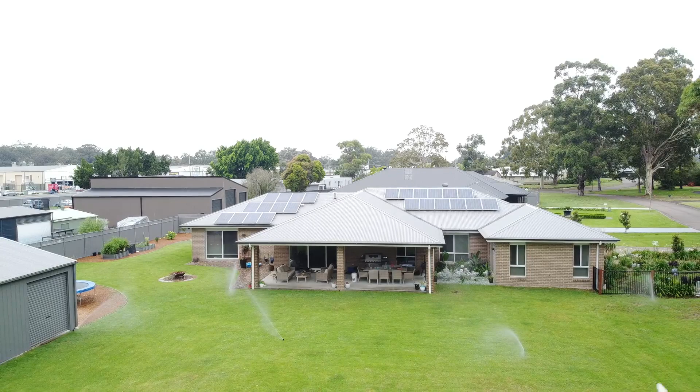So you'll end up with a whole pile of boxes full of all your kit and gear to do your irrigation install. But firstly, we need to get some planning done. So let's run through the steps to make sure you get it right. Now before you get into the design, there's one important factor you need to consider, and that's the pressure and flow from your selected water source.

Most people would use a hose tap, and in which case you want to do all your testing from that point. In our case, we've got a spear point, and we've got a pump that we know flows at 100 litres per minute, and we use that as a basis for all our calculations.

Now when it comes to town water, it's very important to test not only the flow, but the pressure. This allows you to select the most appropriate irrigation fitting and allows you to determine the maximum number you can run in each zone. So when it comes to testing this pressure, I think the best way is to get a pressure and flow device.

Now you can buy this online from an irrigation supplier or hardware store. If you're going through an irrigation supplier, they will probably come out and test it for you using their own calibrated equipment. If you want to do it yourself, there's a lot of videos around on how to properly use those pressure and flow devices.

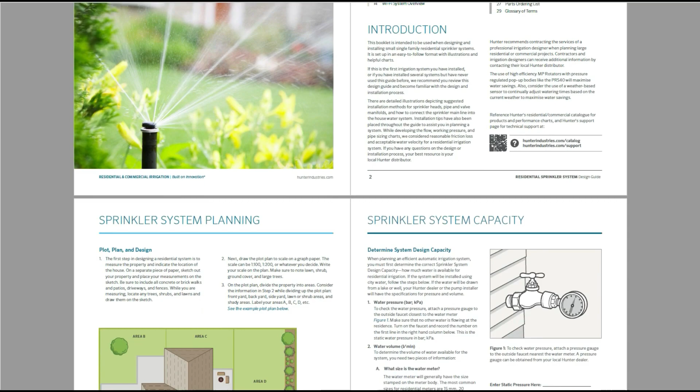Now it pays to have a look online, as most manufacturers have some excellent online resources. For example, Hunter Industries, who we're using for most of our gear, have this very handy and useful residential sprinkler design and installation guide. This is a very comprehensive document which takes you through planning your system, to selecting your sprinklers, to the installation, and includes some really handy illustrations and diagrams.

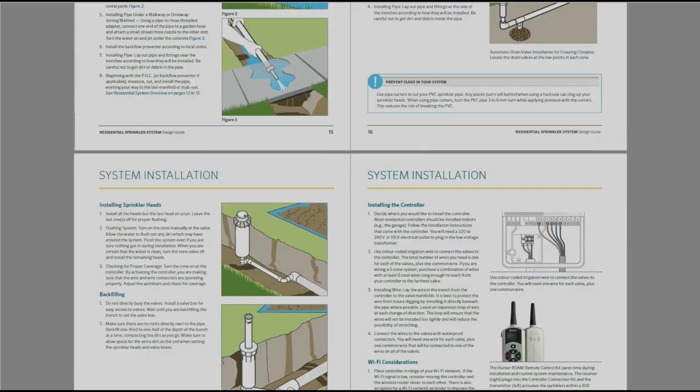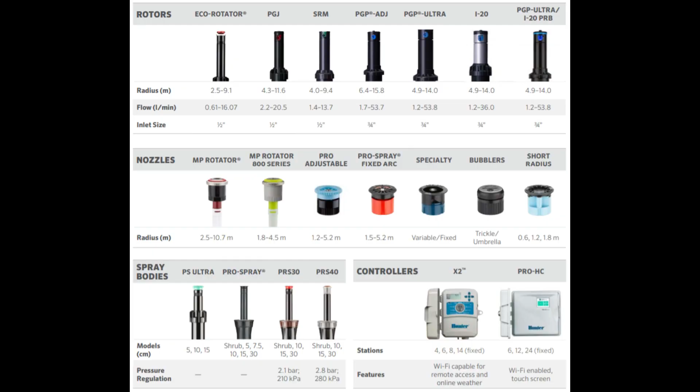It's a good idea to break your areas down into similar width zones. That way you can select the most appropriate sprays or rotating nozzles to best irrigate the area you're trying to treat. So as a simple starting point, you want to match the width or the depth of the area you're trying to irrigate with the radius of a sprinkler which best suits that range.

For this example, we're going to use our main side yard that you would have seen in the introduction to this episode. Firstly, we identify the area we wish to irrigate. So in our case, we've got a large septic mound off to one side that we don't want to water, and we're going to irrigate out from the house and around the corner of the shed.

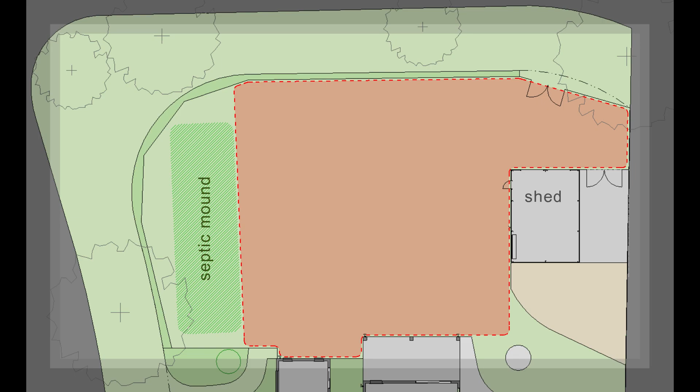The first step is to lay a grid over the area you're looking to irrigate. In our case, a 9-metre grid works extremely well. You then look to place your sprinklers at the intersection points of these grids and around the perimeter of the area you're looking to irrigate. You then start overlaying the radius so you can start looking and evaluating your overlapping patterns.

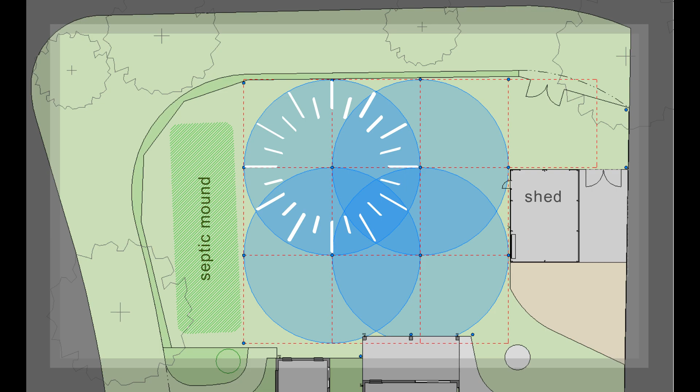So we'll start with the 360-degree radius first. Now we have the 180-degree patterns, which are generally along the outside perimeter zones. You then have your corners, which are typically 90 degrees. However, we have a few 270 degrees where we're sweeping around the corner of the shed and into a third zone, which goes off to the bottom right-hand side of the screen.

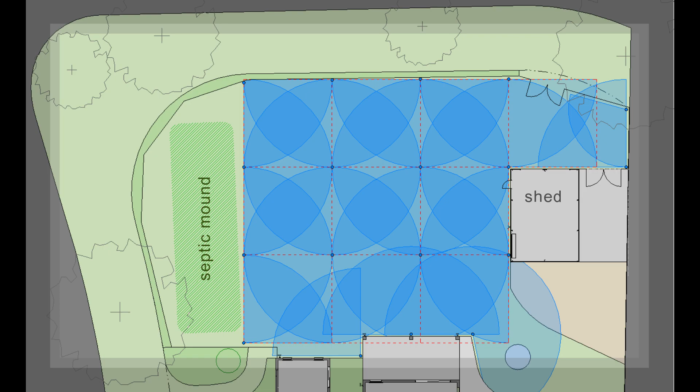And with the final diagram, you want to see reasonably consistent patterns, and that will ensure you've got adequate coverage and fairly consistent water distribution. So you can see with ours, we do have some slightly drier spots off to the sides or where we've got these awkward spaces, which you're typically going to have because you're going to spread it out where you need to, because not everything's going to be to that exact consistent grid.

The next step is to start looking at your pipework, and I'm going to keep it very simple here because there's a lot of factors in play. But essentially you want to appropriately size your pipework depending on the flow and head pressure that you need, depending on the type and number of sprinklers that you're using. But the most critical thing is how your pipework is laid out.

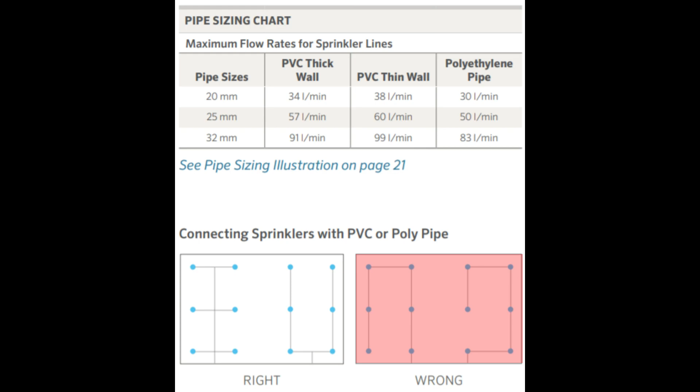So the typical way to do it is a T system where you run your pipework up through the middle and you branch out to your sprinklers on either side. The alternate method is the U, where you're splitting the water from one side to another. What you want to avoid is running them in series. That is, the water is flowing from one sprinkler to the next, to the next, kind of like how string lights work. But what's happening is you're losing water pressure every time you go past another one of these sprinkler heads.

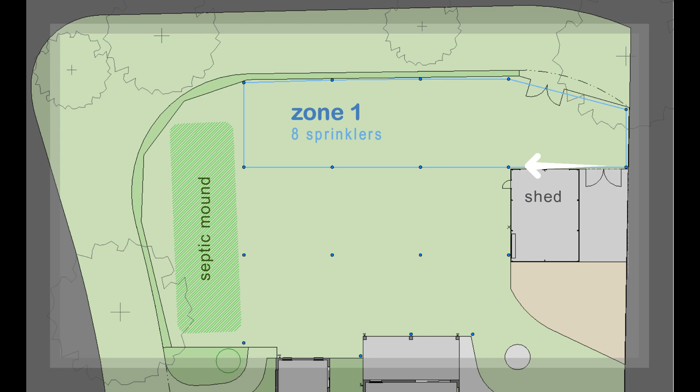So what we're doing for each of our two zones here is we're going on a variation of the U method where we're actually connecting it to make it a full loop for each circuit or zone. So zone 1 goes all the way across to our septic mound, up to the fence line, back across to our fence line on the right hand side, across past the shed, and it can keep going in that continuous loop around and around, and that alleviates all the dead ends and the variances in water pressure as the water is flowing around.

Our second circuit does essentially the same, except it's slightly shorter, and that happens on the bottom side. So you can see while everything is laid out in the perfect grid, you end up with two long rectangles essentially, which are your two separate zones, with nothing in between through the middle portion of where our shed lies.

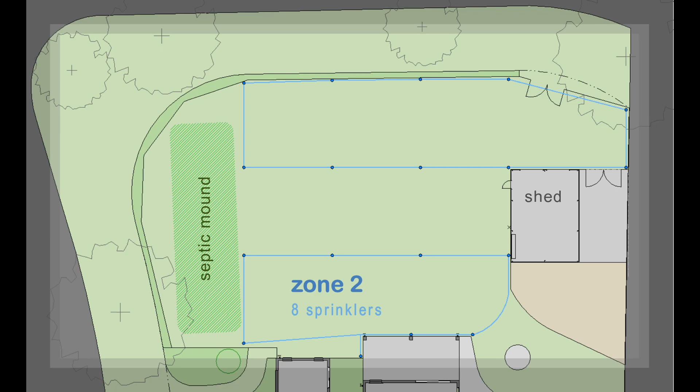From here, it's a matter of connecting each circuit up to your water source. So in our case, we have a manifold on the back side of the shed, and we run our pipework in trenches to the appropriate zones. It's important to look into the future. So at this point, while we had the trenches dug, we also put in some additional lines to service our outside verge area whenever we got a chance to get up to that point.

So that alleviated having to dig up the trenches once more to lay the pipe back out to these extremities of our block. And I think it's something to consider while you're not necessarily going to do it all at once. To future-proof it and put the pipework through where you're already digging is a very, very good idea.

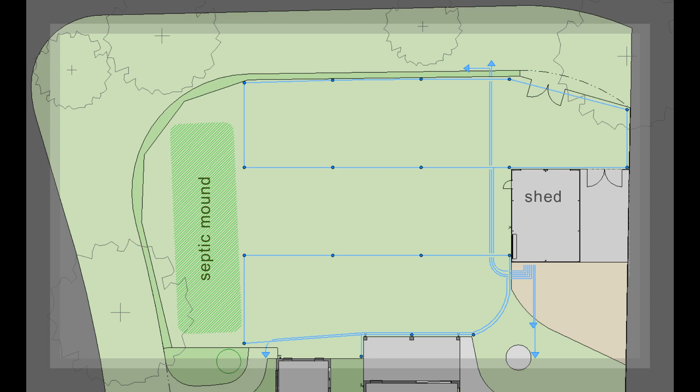Now, once you've got your design roughly sorted out, I highly recommend you go down to your local irrigation supplier and have them have a look over the plan, tweak anything that needs to be done, and then guide you on exactly what you require and what you need to do.

What you will find is once you get all your supplies and come home, you'll end up with a big box of parts, and it can get quite bewildering. So what I've done is I've just laid out our sample circuit that we're doing as part of this episode, just to run you through all the parts involved and to hopefully simplify the process down for you.

Now, it generally comes down to three fairly critical parts. The first is your controller. So we have a simple Hunter X-Core 8-station controller. It's nothing fancy, it's not wireless or anything like that. You can program it, you can do whatever you need to do, and it just sits on the wall in the shed here.

From the controller, you're going to have to control each of your circuits using a solenoid, something similar to this. Now, it is essentially an electronic ball valve. So it controls the water coming in and tells it when it can go out into the specific circuit that you want to water at that period of time.

The third component is obviously your pop-ups. So depending on the size of your block and what you're trying to water, there are a whole heap of variations of pop-ups. Now, as we stated before, you only want to do this once, so go for a really good brand that is reliable, that you can trust, and most importantly, is also serviceable. So in our case, we're doing quite large areas, so we're using these Hunter Industries PGP rotators.

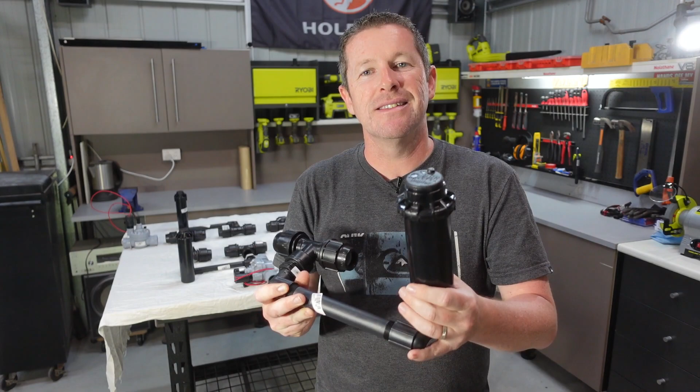You can get them in a few various sizes, and my understanding is you shouldn't mix and match different watering devices. So in our case, we can actually mix and match various sizes of the PGP rotators, but we wouldn't try to incorporate some other sprinkler head that isn't a rotator type. It just unbalances the cycle and the pressures that you're running through the system.

So my original thinking was that your sprinkler heads simply screw on to a T-piece or some other connection onto your pipework, similar to how you do your garden sprinklers. But it's a little bit more complicated than that, and it's just so that you can get everything all balanced and positioned right in your lawn so it's all set nicely.

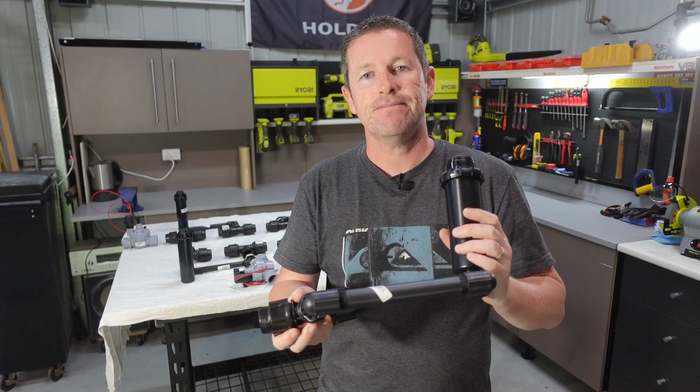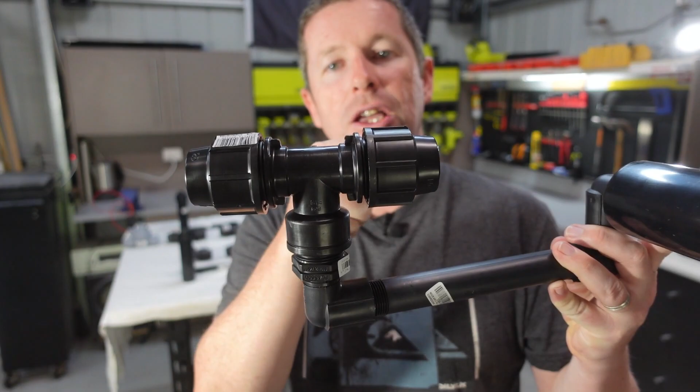So what you will also probably get if you're doing a high quality system such as this is you will have a T-piece joiner that goes into your pipework. Now that will have usually an adapter onto it, and then this U-shaped series of pipework with elbows and straights that is called a riser.

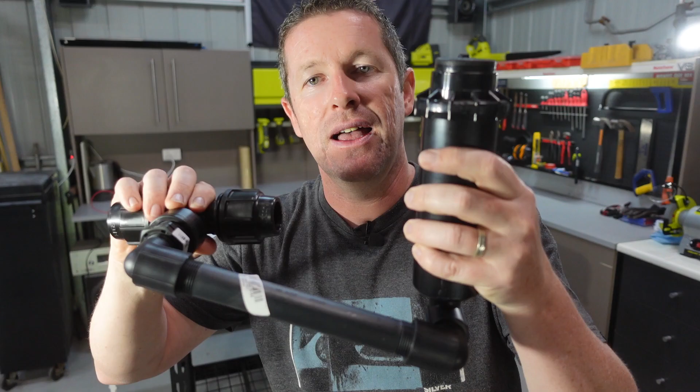Now what it allows you to do is the pipework can run through in the trench, and then locally where you've got your sprinkler, you can actually adjust the depth and the size of that trench to level the sprinkler so that the top of the head is flush with the soil line. You want to make sure this is down far enough so it is definitely at the soil line.

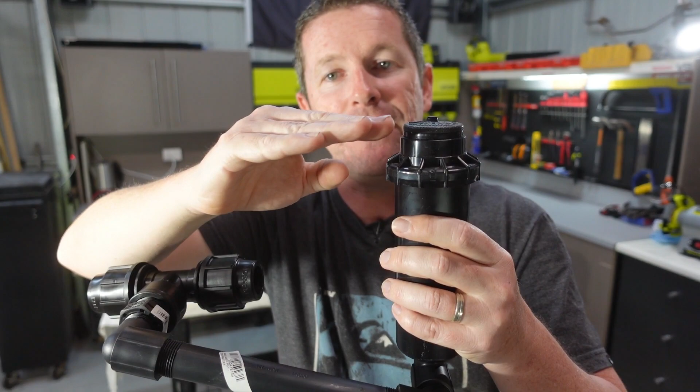If you have it sitting up level with the top of your turf or your grass, it's going to get damaged. When you mow it, you'll take the top off it, and you don't want to do that because these are quite expensive items. So it looks like a lot, but it's a very, very simple system once you put it all together and work out how it all works.

You simply dig the trench through. We generally sit it down about 200 mil. You're then backfilling on top of it anyway. You can also peg the pipes in, but we find that once you've got the weight of the water in there, it doesn't tend to move around anyway, even with the soft loose sand that we've got here. If you've got a heavier base soil, that's going to weigh it down even more.

Now just remember, it's not going to be an easy task of just cutting a trench through. You will uncover things such as pipes, roots, all sorts of obstructions, so your pipework may have to go up and down a little bit, depending on if you can actually cut through or work around those obstructions. Now we're using 25 mil blue stripe thick wall irrigation pipe.

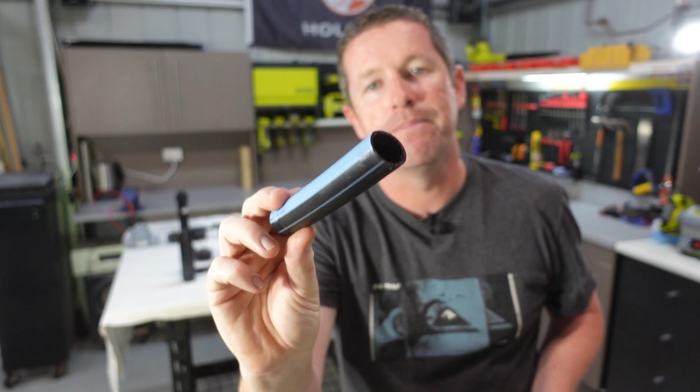And it works in conjunction with your high quality compression irrigation fittings. You simply put the pipe together with all the collars and then tighten it all up. And that works really well. There's a number of different brands you can get. We use Plasson. It's what our local irrigation place supplies and recommends.

Now there is another option you might want to consider, and that's to use a thin wall pipe. And it has these sort of locking on fittings, more like your normal garden irrigation. I know a lot of people use it with great success, but again, it's a theory. You want to do it once, you don't want to dig it back up. That's why we use the 25 mil thick wall pipes and compression fittings.

So this stuff you can get from your local hardware store, Bunnings, stuff like that. You won't be using the fixtures that we're using here. So if you are thinking about doing a thin wall system, this probably won't apply so much as far as the actual products that we're using. However, the layout will still give you a guide on what you need to do. Anyhow, we'll step in now and I'll run you through the circuit and how it all sort of works. Now don't be scared. It's really quite simple once you work through it all.

So here, I've got our simple loop system, which we're going to do up the side of our driveway. It's exactly the same how we set up our main systems in front of the shed here, and generally applies to nearly everything that you do, unless you're doing a T-based system where you run a main line and you're running T's with dead ends off the end. As I discussed in the design stage, I think it's a lot better from a fluid dynamics point of view to run the water in a continuous circuit around and around, rather than shooting off and going to dead ends.

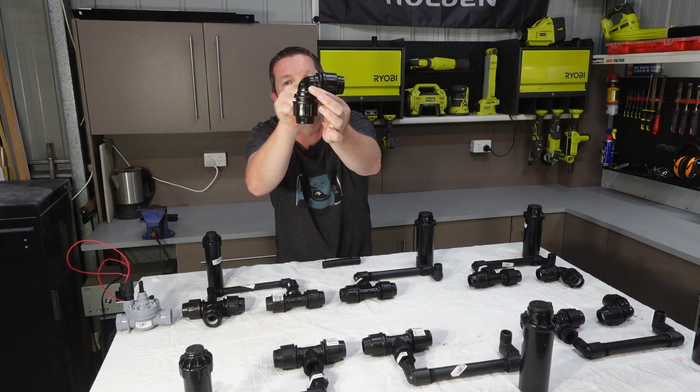Getting into the simple circuit. So what you have is a solenoid or some kind of device which can control the flow to the circuit. From there, you'll usually have your pipework, and there you have a series of T's with compression fittings on all three sides, and a series of elbows, again with a compression fitting on each end. And that will start the rectangle sort of shape or the circuit that you're doing. And that allows the pipework to go one way and then to cut across and return back around the other way. And then you start placing your sprinklers along.

And remember, this is spread out, in our case, about 20 meters. So there's a lot of pipework in between, and it doesn't really take that long to put together. Now your solenoid could be located in an underground box close to the actual circuit itself, but just remember, you then got to run your electrical cables all the way back to your controller. Or what we do is we've got a manifold on the outside wall of the shed, which I will show you, and all our solenoids sit off that manifold.

We've got a simple wiring harness that goes into the controller, and then we run the pipework from these points to all the areas of our yard. So that in our case was a simpler solution. I think it just makes a little bit more sense from a servicing point of view. They're all there, you can test them all, see what's going on, and then from this point onwards, it's just pipework.

Now when we get out and start installing all of this, it'll make a lot more sense. But I just thought I'd lay it out and give you a bit of a visual on how all these pieces go together. Once you've done your first circuit, it's really quite easy. You may have different ways to deal with it or have a different system that you want to use, but the basics are generally all the same. In the next episode, we'll head out to the front of our property and show you how we go about installing a typical zone using all the components we've just shown you. Stay tuned, it's a little bit of hard work, but it's worth watching, and it will show you how it all goes together and how it becomes operational.